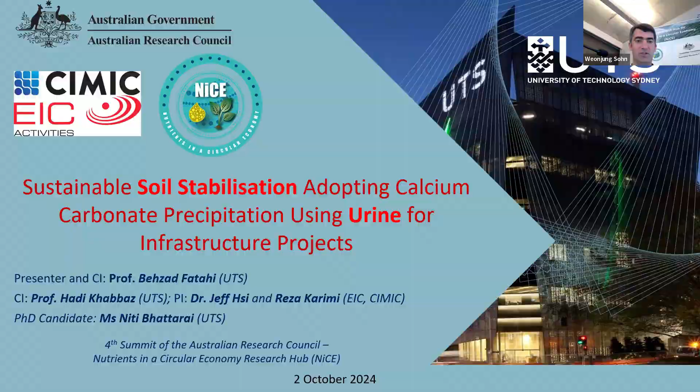In this particular project we are looking at improving the infrastructure built on top of closed landfills. Because of continuous urbanization, increasing population and so on, a lot of lands that we need to build our infrastructure on are not that great. In many projects, particularly in Sydney - and it's the same in Melbourne - many parts of roads and railway lines may need to cross old landfills, which are not suitable grounds for built infrastructure because they are very weak and they settle over a long time. That's why you get a lot of cracks on the roads, or they close the railway lines every so often for maintenance.

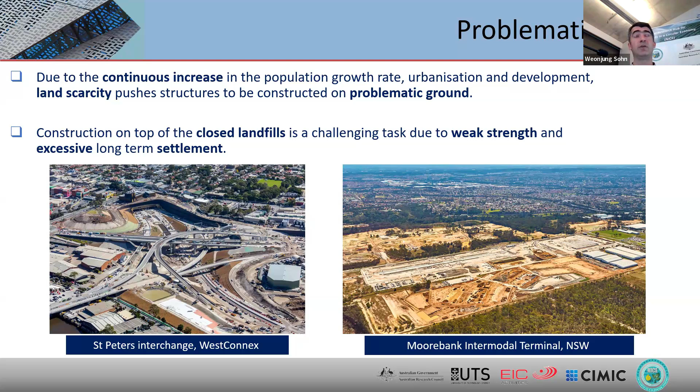These two projects are both in Sydney. One is a road project, a spaghetti junction sort of thing, and the other is in the western part of Sydney, a railway project built on landfill, part of it. One of the techniques used to stabilize these grounds and make them more suitable for construction is addition of cement.

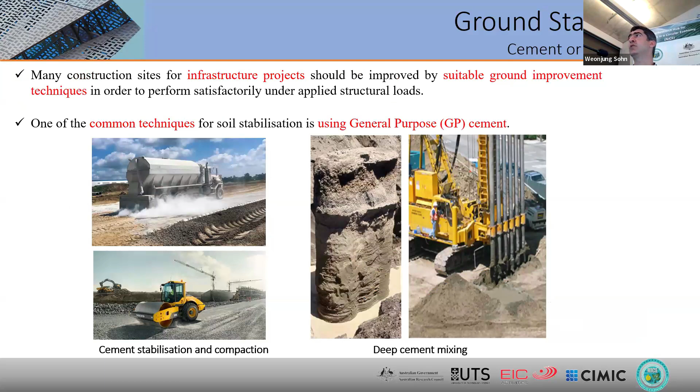In Australia, cement generally is cheaper than lime. In Europe, lime is also very popular. Basically, they mix the cement with the material or inject it in the ground to improve it. The generation of cement is one of the biggest producers of CO2 emissions, accounting for 8% of the world's carbon dioxide emissions. So there is a great incentive to find alternatives to replace the cement.

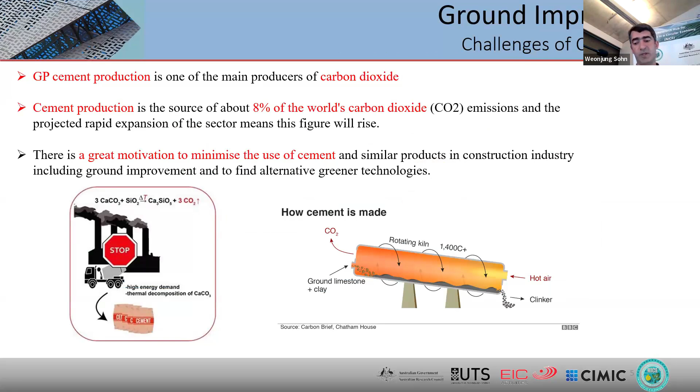So the idea of the project is that, for example, for landfills, what we do is get the urine, mix it with some stuff - I will show you the formula for that - and then basically generate the cement in situ. So the ground becomes stronger. The same concept, at a lower level, applies to bio-bricks to make bricks out of clay. So this has been explored.

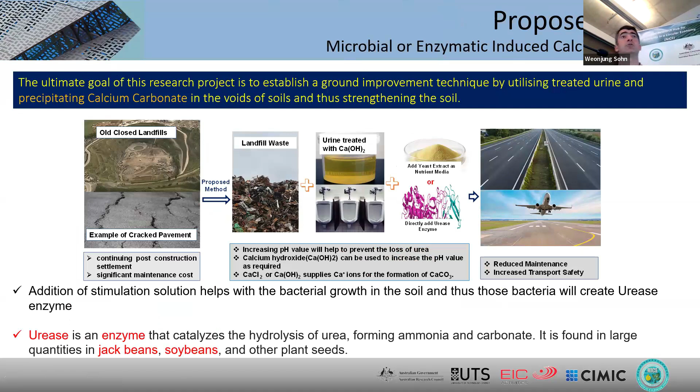In terms of the formulation, how this process works - we call it biocementation, not artificial cementation, but bioproducts. You get urea from urine using a urease enzyme that some bacteria in the soil basically create. Then this catalyzes and separates ammonia and bicarbonate. Then we add a separate calcium source, and this precipitates inside the soil as calcium carbonate, which is a natural cement. That's why many rocks are much stronger than soil - over time they have been naturally cemented. That's why we are very much familiar with it.

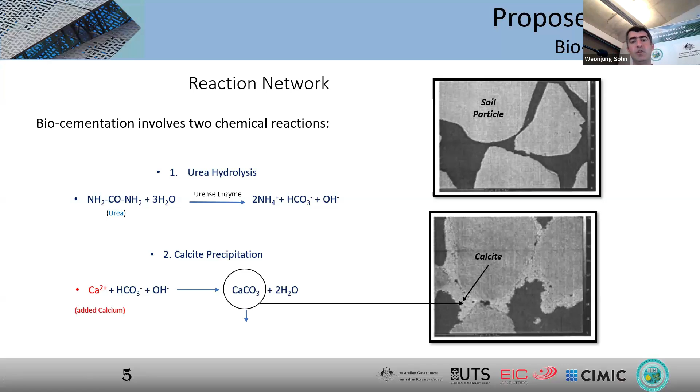So in simple form, you get urine that has urea, which is the main part of our work, with a lot of water, plus urease enzyme from bacteria. You create bicarbonate, we add calcium, we create calcium carbonate. Ammonia and ammonium will still be generated, which is some sort of issue for us. The reason we add calcium chloride is that we need a calcium source to create the cement, and we also need to maintain high pH to prevent the ureolytic activity from losing the urea that we need.

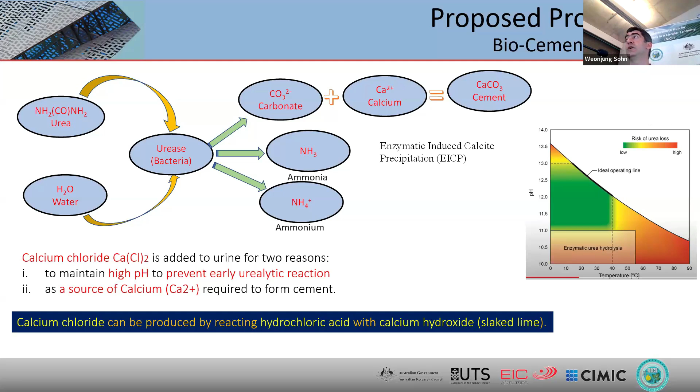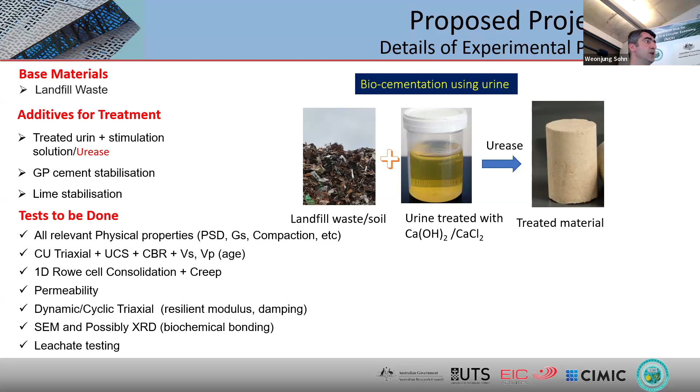So the tests we are doing - I will show some results - are on landfill waste. We compare it with cement and lime and this new treatment, and we do a bunch of tests, generally mechanical tests. We also do some chemical tests, but we want to see how much stronger it is, how fast water flows through it, and so on.

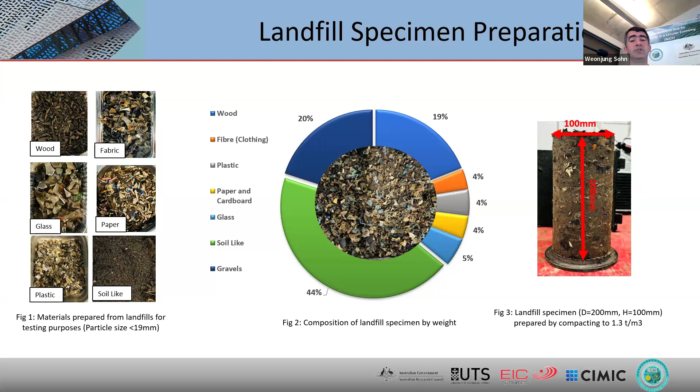This particular one is an uncontrolled landfill, of which there are quite a number around Sydney, but they are not municipal. So it's a fair bit of construction waste and so on that went there.

In the second stage, while the population of bacteria has increased, we add a calcium source through calcium chloride. With the existence of bacteria, it will generate the cement that I showed you in the previous stage.

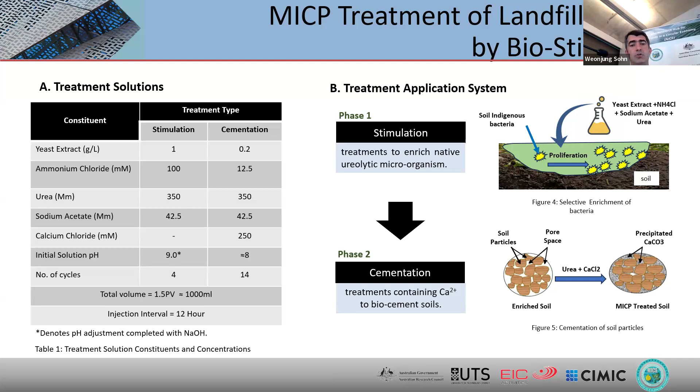So this is the first stage, stimulation. Then we add calcium source plus urea and so on, and treat it. The material here has now gone through two steps and is stabilized.

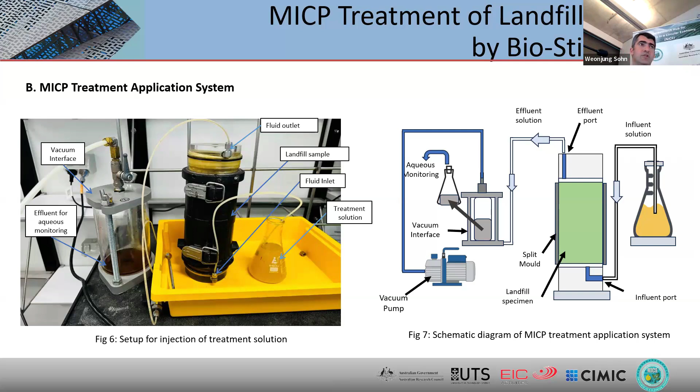So now we have done the test. The first step is to make sure the bacteria has grown enough inside the sample. The way we do it is by measuring the hydrolysis of the urea from the outflow. As we can see, the hydrolyzing keeps increasing, meaning the bacteria is active. This is four cycles of running this liquid through.

Then after that, the treatment cycle starts, with injection of calcium plus urea and so on. After that, we measured the shear wave velocity of the compacted treated landfill. From cycle 0, meaning without treatment, to 14 cycles of improvement, the stiffness of the compacted landfill has increased from nearly 50 to 300 - a six times increase, which is magnificent. So you stabilize the ground and increase its strength nearly six times.

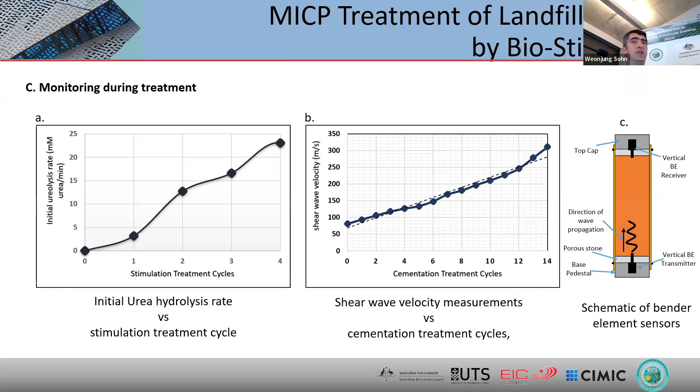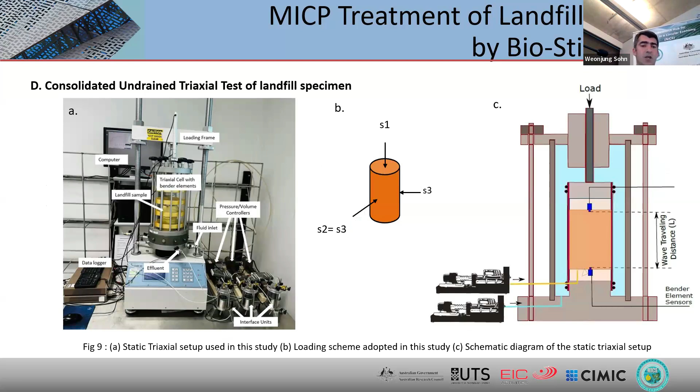That first test is a non-invasive test, meaning we don't crush it to measure it. It gives a stiffness indication. Then we do a triaxial test, which is basically the same as crushing concrete. We put it in a chamber, apply air pressure, then crush it. This is called a triaxial test, a rather well-established test in civil engineering.

Here we have done two tests, very recent ones. Niti gave me this just a few days ago. This shows the stress and strain relationship for the material, untreated versus treated with this new biocementation. For around 15% strain, the strength we report here is less than 200, and after treatment, the strength is 400. This means the actual strength of the material is twice as much - meaning the size of your foundation can be half.

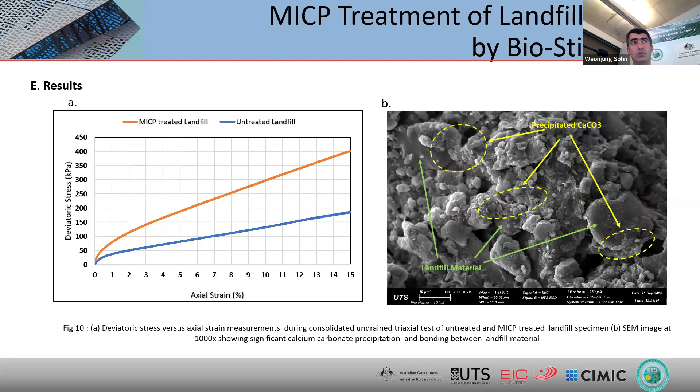So imagine, in addition to the use of cement, how much you can save in terms of casting concrete and so on for the foundation.

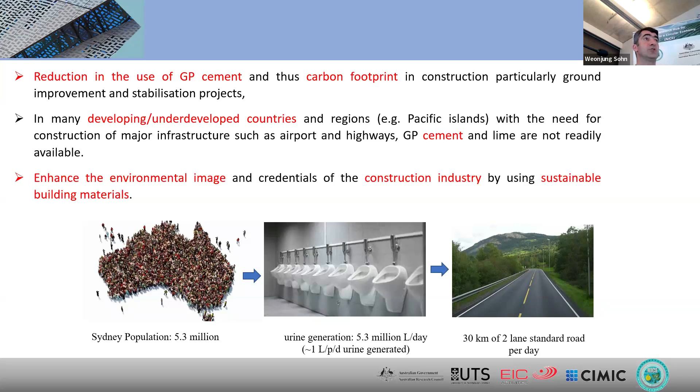So the benefits this project has: we can reduce the use of general purpose or Portland cement for construction. That's good motivation for everyone to use it and reduce the carbon footprint. Some developing or underdeveloped countries, particularly Pacific Islands, don't have cement - they don't have that choice. But this is what they have - urine - so they can use it. This will also improve the environmental image of the construction industry, which is not that green. It addresses a fair bit of sustainable development goals.

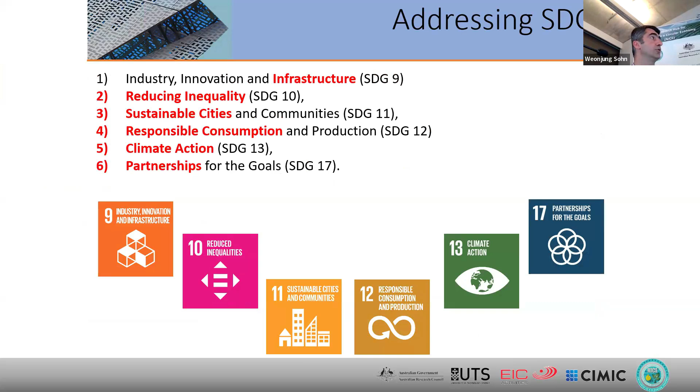I don't think I'll go through them - we can look at them. So this is quite exciting, and there are a few opportunities for collaboration.

One is if we can find other stimulation solutions or enzymes to create this effect, adding enzymes or other stimulation solutions. Something I proposed last year was anyone who can help concentrate urea out of urine - we are very interested to collaborate with you because we need that urea.

Something else that just came to mind is that since we add a calcium source as well, if some sort of calcium can be produced through this urine - doesn't have to be very pure - that we can add, we don't have to add extra calcium from other sources.

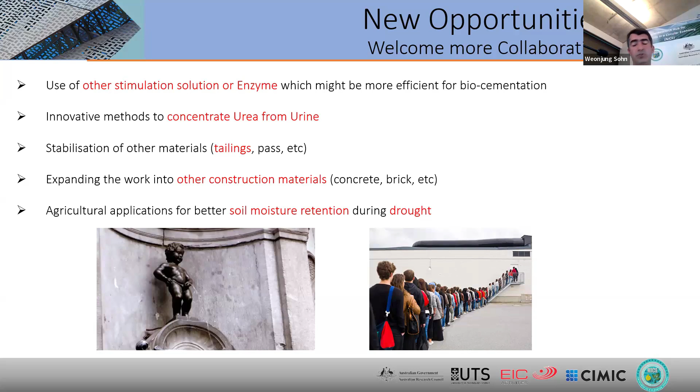We are exploring other avenues for tailings, pass, and other materials for improvement, such as brick, concrete, and so on. We can also look at using this for soil moisture retention for agricultural purposes, but I don't think we'll have time to cover it during the life of this NICE hub - maybe post-NICE.